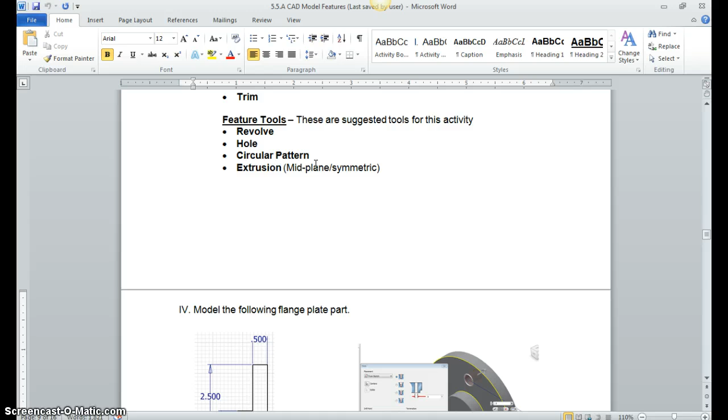Alright, this video is to create the flange plate part, in 5.5a. The nice thing about it is they give you the sketch for the revolve, which tells you you're going to use the revolve and hole feature. Let's do that. Notice right here is our axis of rotation.

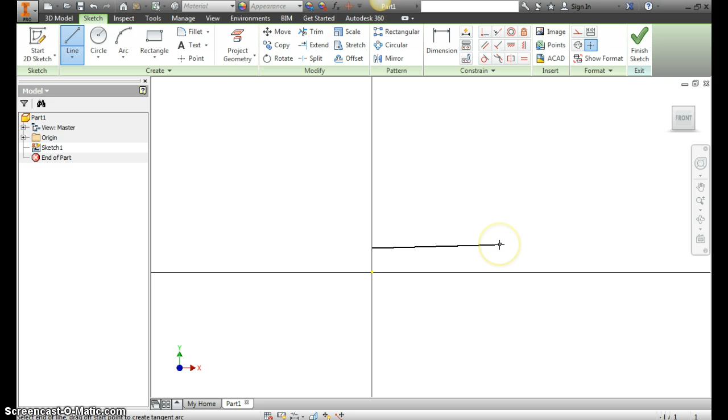If you look at the sketch, I'm going to draw a rough sketch out here in Autodesk. Start our sketch on the XY plane, and use the line command so I have this right. It's a backward looking L. I'm going to start here, making sure I'm on the Y-axis.

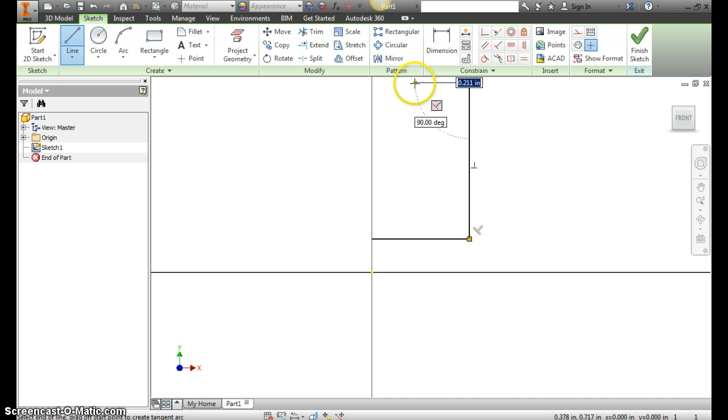Vertical, cross, back down. Alright, so we have that basic shape.

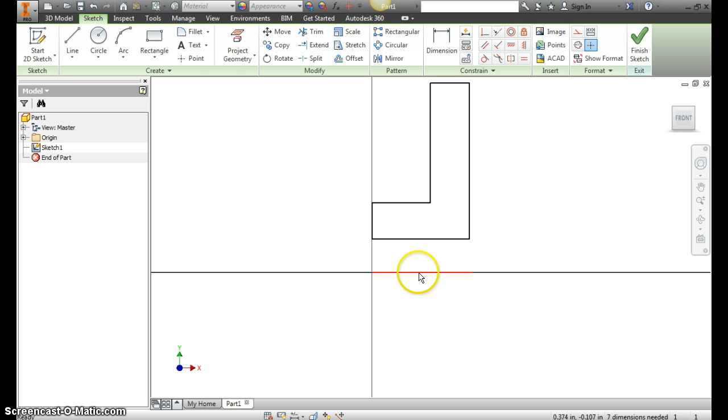If you take a look, we'll start dimensioning. From our axis of rotation, which I haven't created yet, I'm going to make it a simple line down here. It may be hard to see at first because it's right over top of the x-axis, but nonetheless we've got our line. And if you look at the dimension right here, it's kind of jumbled, but that 0.375 is telling us the radius of the circle that will be created.

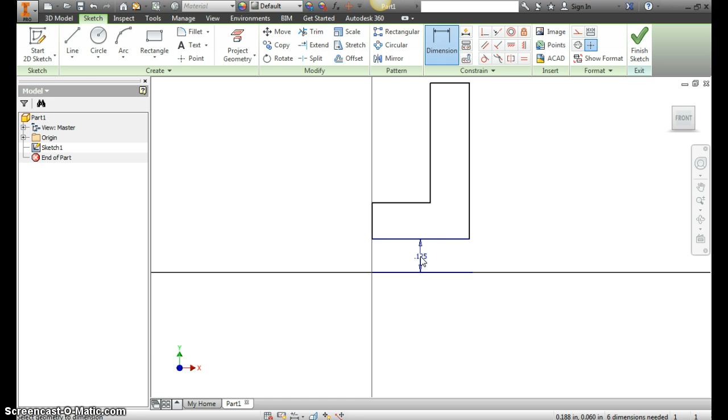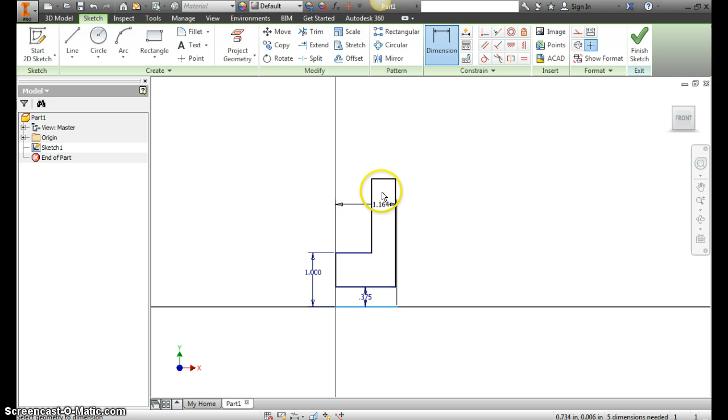So I'll create that dimension, 0.375. We'll zoom out a little bit and work our way up. The next dimension is 1 inch from the axis to the top, the next line. So we'll do that dimension as 1 inch. And our final dimension, 2.5 from the axis of rotation to the top, so we'll put that in as well.

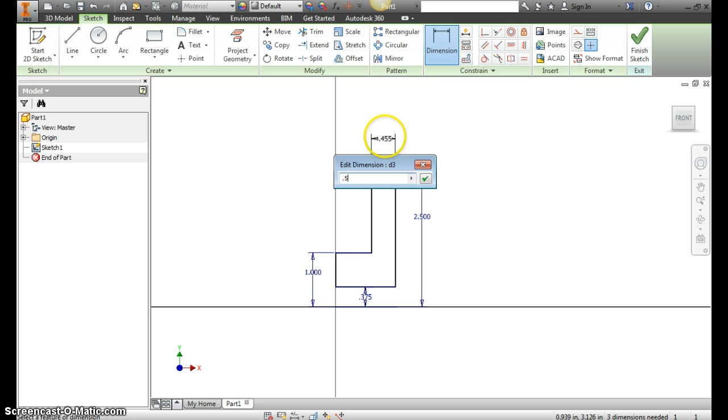So we've got our heights set. Now the only widths they give us are the ½ inch here and the 1 inch overall, so we'll put that in. I'm going to click this one line and make it our 0.5, and then from this left edge to right edge is the full 1 inch. Let's double check we have our numbers - 1 inch high, 1 inch wide. We've got everything good, so that's our sketch.

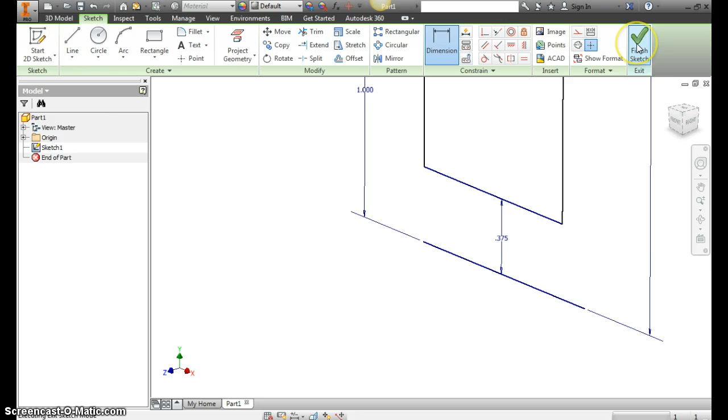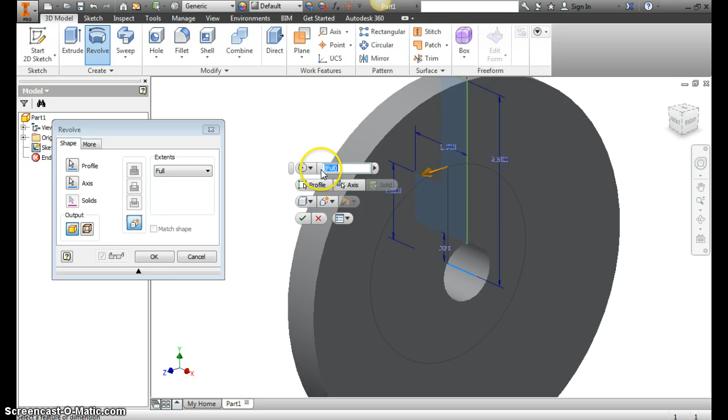We can finish the sketch and not extrude but revolve, and here's where that axis came into play. So the profile is going to be this little L shape. Then we come down and specify the axis, right here. If you look at that, looks right - we've got our full revolution, so we hit OK, and I'll click up here so you can see that flange plate.

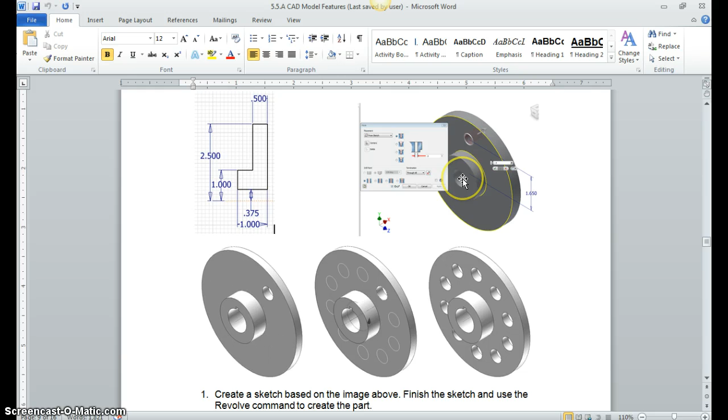So we've got the plate itself done. The next thing they have us do is create the sketch, apply a sketch, and place a point vertically aligned with the sketch. It's a diameter of ½ inch through hole, and it's telling us that's 1.65 inches from the center - from the very middle of our sketch to the top.

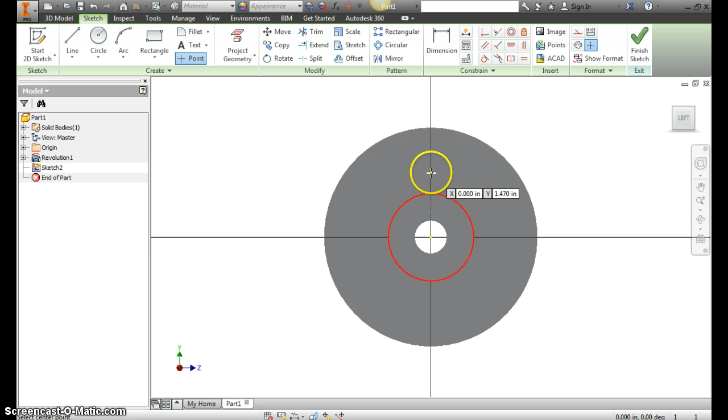So with that said, we're going to sketch on this front flange, and I'm going to put a work point because that's what we use for holes. Since we've set the center to 0,0, I can just notice that my Y is changing. I'll hit tab twice and get 1.65, leaving my X at 0. I now have my center point for the hole.

So we hit finish, and we've got our hole command. It automatically highlighted it - we have a through hole. This is just a smooth hole. Diameter happens to be - no, I'm sorry, diameter is ½ inch, so we need to enlarge that. Termination is through all, meaning it goes all the way through the part. This is the part we need to edit - ½ inch.

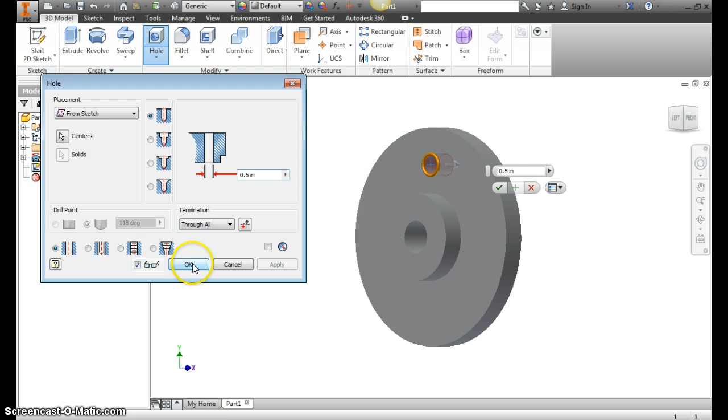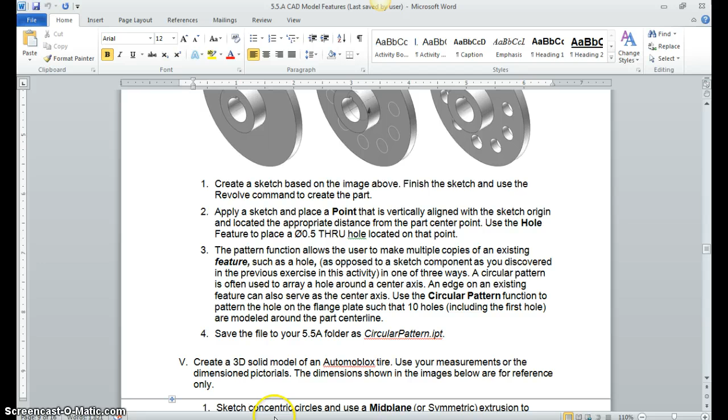And hit OK, so we now have one of our holes for the flange plate. If you count it, we've got 2, 4, 6, 8 - there's a total of 10. So you go down here, the pattern function uses multiple copies of an existing feature. Up here on the pattern commands, we have rectangular and then circular.

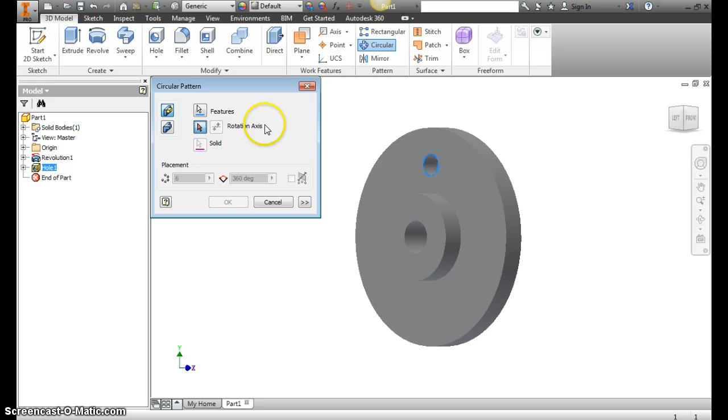Since this is a circular part, we're going to want the circular pattern. From there we go to the features, highlighted feature - it's wanting us to pick the feature that we want to pattern. The feature is going to be just that hole, so you can select that. The next thing we need to do is specify where we're rotating, so if you click next to that, the rotation axis - there's an axis right through the middle. That's the axis we want.

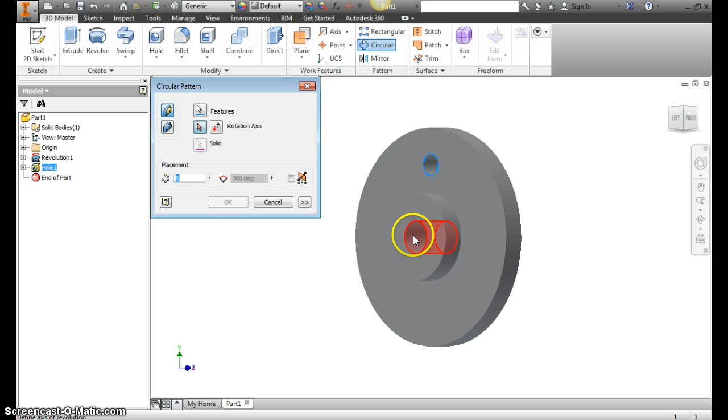The nice thing about Autodesk is that it can understand what you're looking for. If I select any of these circular features, it's really going to pick up the center axis of that feature. So I typically look for the center hole and click right in the middle, and notice that blue axis shows up - it's been there the whole time, it just happens to show it to you now. I said we needed a total of 10, so we'll change that, and the rotation axis 360, hit OK, and we have ourselves a very nice flange plate with 10 holes.

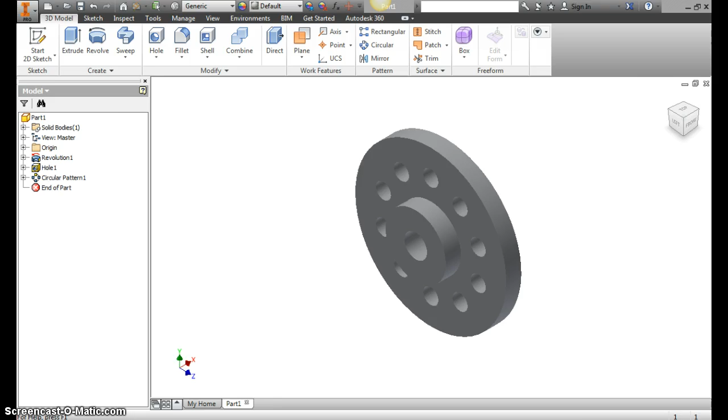I believe that's everything, so we can just go ahead and save it as circular pattern with your initials and put that in the 55A folder.